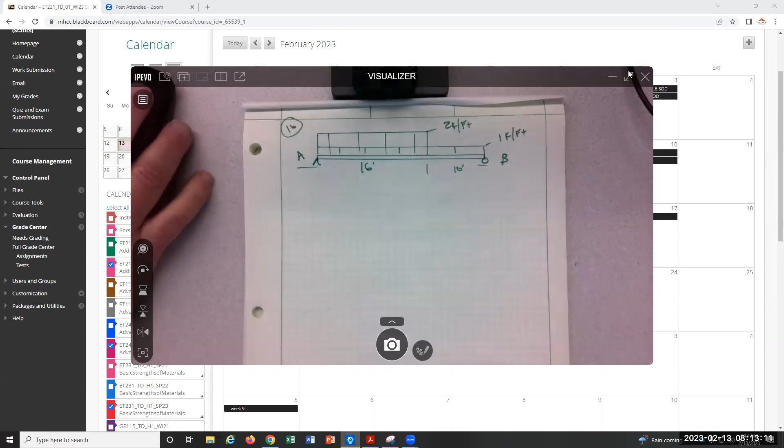All right, so let's go over number 16. Several folks had problems with 16. I went through the homework and the quiz—there were problems on the quiz and problems on this one, which I'm not sure exactly why, but I want to go through it and make sure, because this is very similar to something you will get on Wednesday. This one said, find the reactions at A and B.

When you get a problem like this, especially Wednesday, it's good to categorize it in your head. If it's saying find the reactions, then you are working with equilibrium, and that's those 3 equations. If it says find the resultant—I'm sorry, they both start with R—but if it says find the resultant, you're not working with equilibrium. The big problem students have on Wednesday is it'll say find the resultant, and everyone goes for the reactions. That's not what we want. If it says find the resultant, you just want to take these 2 forces, concentrate them, and then find the single force that could replace them. So that was like chapter 3. That's the big confusion.

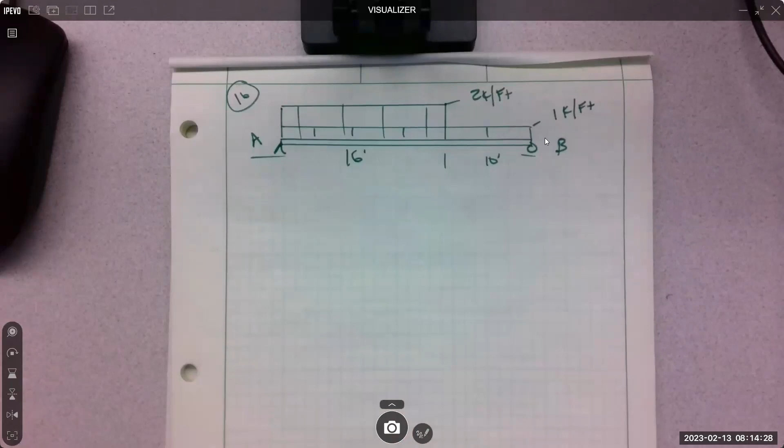Chapter 4 is find the reactions. And reactions are—if I get rid of the support and put in the reactions, AY, AX, and BY—I get rid of those supports. That's the free body diagram. That's chapter 4. These are reactions. There's 3 of them.

These are external forces, and if I combine the external forces into one force, that would be a resultant. Two different creatures. We don't do resultants when we're doing reactions because everything's equal to zero. There is no resultant. So if that's still not clear, try to get that clear before Wednesday, whatever it takes. We got to figure that out.

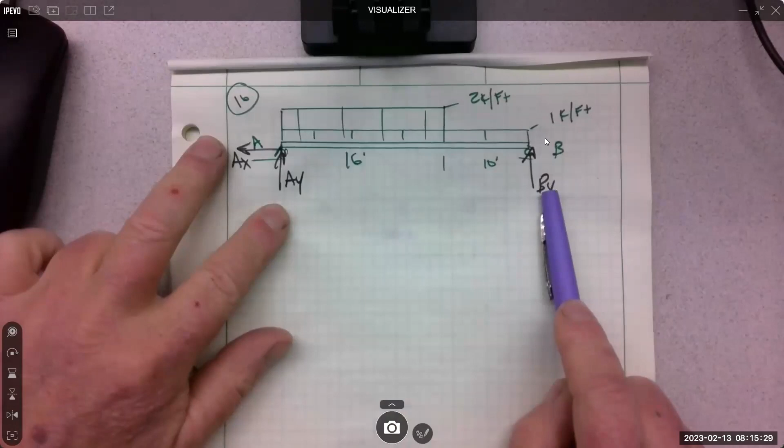So what do we do on this problem if we want to find the reactions, these three? What do we have to do with these distributions? We don't do any moving, not when we're doing reactions. What do we do with distributions in general? Do we leave them like that?

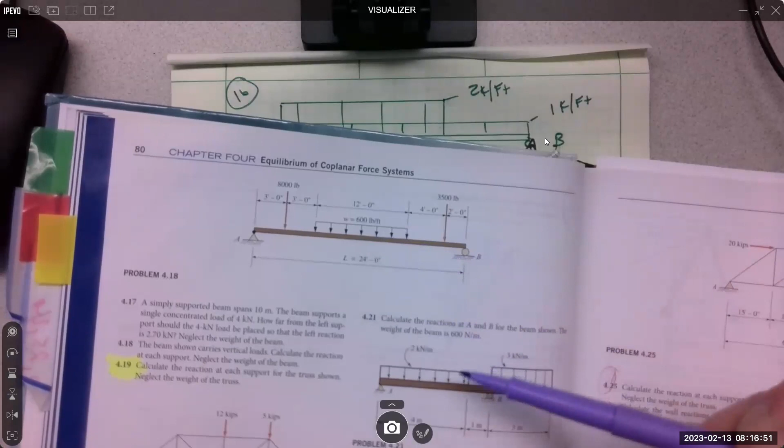Like if I'm going to sum the moments, how would I do that? Yeah, you got to concentrate the distributions. You got to get rid of them. Turn them into a single force. That's the first step. Anytime you see a distribution like this, or any other distribution, all of those, step one is get rid of them, concentrate them.

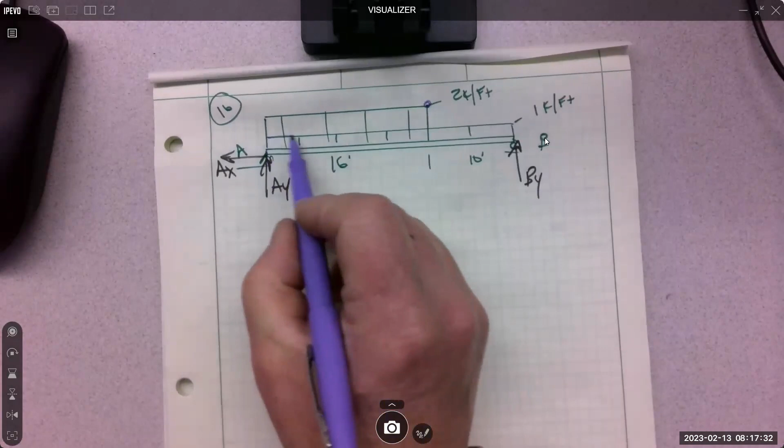How do I concentrate a distribution? How do I get rid of this rectangle? Yeah, calculate its area. So you can do this a couple different ways. You can use this 2 foot, or you can use this 1 foot. And I think that's where people got confused, because this is 2 foot right there. So I can use this rectangle and concentrate it.

That's how I would do it. How tall is that rectangle? It makes a total difference. The way you concentrate it is the area. You got to know how tall it is. Area, right? Length times height for a rectangle.

What if it's a triangle? 1/2 base times height, right? What if it's some parabolic curve? That'd be rude if I did that, because we haven't done one yet. But what if it was? How are you going to concentrate some crazy parabolic curve? Front cover of the book has the area of some crazy curve right there. So yeah, we have to know the area.

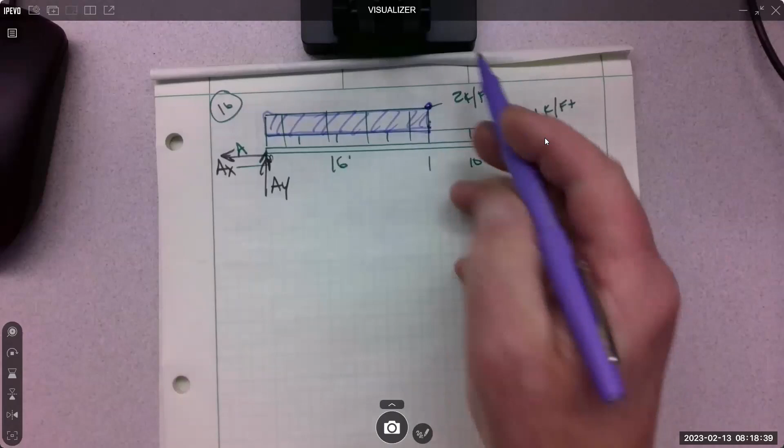You got to know the area, then you got to know the height. How tall is this? If this is 2, if this is 1, and that is 2 up here, how big is this? Yeah, it's a graph. So this is 2 all the way to the top, and this is 1 all the way to its top. So that's got to be 1 and that's got to be 1. So it's easy, when you have multiple distributions, to screw that up.

How would you know that? Was there like cases where the distance is 3 or 4? Well, the only way you're going to know it, Ben, is to really slow down and try to figure it out. Like, what's this one?

Two distributions, right? How tall is the rectangular distribution? Don't overthink it. Oh, right there. Sorry, maybe I just didn't give you a good enough arrow. How tall is the rectangle? 6. So how tall is the triangle from here to here? 6.

It's a graph. If I said from here to here is 6, how tall is this? 6. So then if I said from here to here is 12, how tall is this? 12. So then how tall is that? Yeah, same thing, same exact thing, right? We're 6 here, we're 12 to the top, we're 6 there. So yeah, you just gotta draw extra pictures, right? Or whatever it takes.

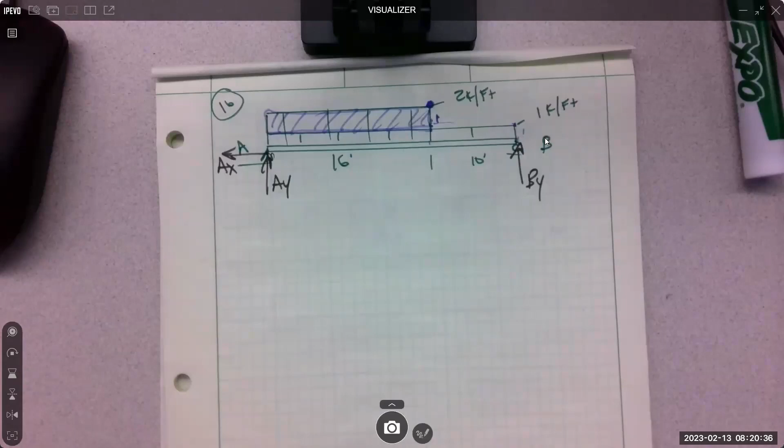All right, so this one is 1 and this one is 1. So I would concentrate them separately. You can break distributions up, concentrate them separately. So how big is this rectangle? Yeah, 1 times 16. And where do I put it? Halfway. So this is 8 over 8 feet, and it is 16 kips. Because I just did this piece, right? This purple rectangle.

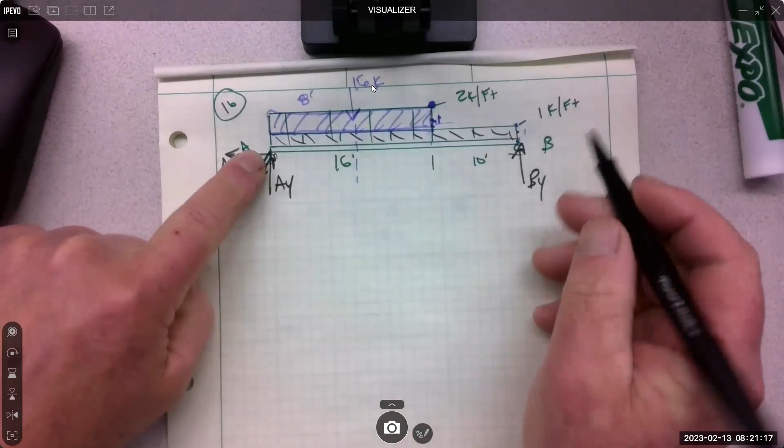Now I'll do the bottom one. I'll give you different hash marks. So it's 1 times this distance, 26, and where does it get applied? At 13, yep. So I'm doing it all on this thing. Now I have a force 16 kips and a force 26 kips, and my 2 distributions are gone, right?

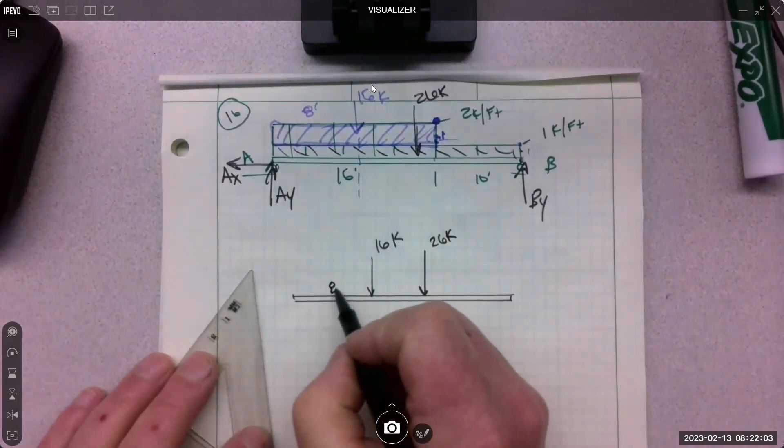If I did redraw the beam, and I'm going to because I want it super clear: it looks like this. 16K and 26K. This is 8 feet over, and this is 13 feet over, right? And then I have BY.

So this is the new free body diagram. AY, AX, right? The pin's gone, the roller's gone, the distributions are gone. This is a good, clean free body diagram. That is also 13. So this distribution is probably the weight of the beam. When you see a uniform distribution throughout the beam, that's probably the weight of the beam. And then this is some extra load.

So now this problem asks for the reactions. That's why these 3 are in here, and then that's the goal. If you're asked for what are the reactions, we want to know what these loads are on the supports.

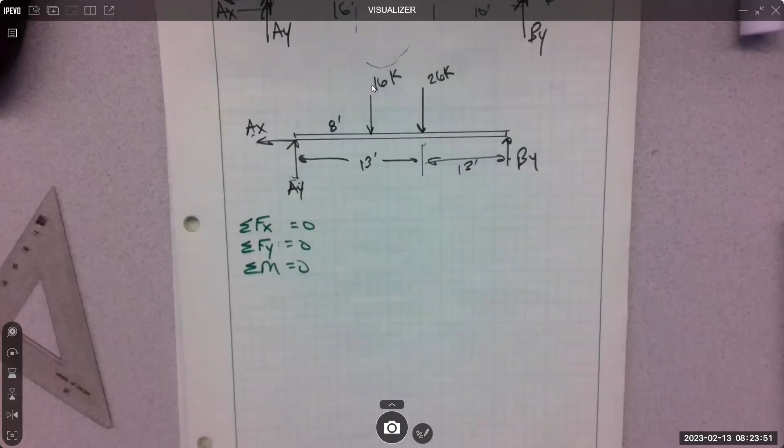So the easy one is: is there a force in a direction all by itself and nothing else? Yeah, AX is the only force in the X direction. So if I was to write that equation, it looks like minus AX equals 0. So I just summed all the forces in the X. There's only one, it's got to be equal to 0. Done. AX equals 0. That's one of the 3 reactions, just by picking that thing out.

How many forces are in the Y? How many unknowns in the Y? 2. So if I write this equation, I'm going to end up with 2 unknowns, and I will not be able to solve it. It might help me in the end. If you don't know what to do on find the reactions, just do the equations. Do all 3. I can say that 100 times, but come Wednesday somebody will get this problem and they will not do the 3 equations. Why don't you just do the 3 equations? If you don't know what to do, just apply these equations.

So summing forces in the Y, tell me what all the forces are in the Y direction. Plus or minus? Minus, because it's pointing down. Yep, what else? Minus 26. Don't forget your unknowns. BY. And we set that equal to 0.

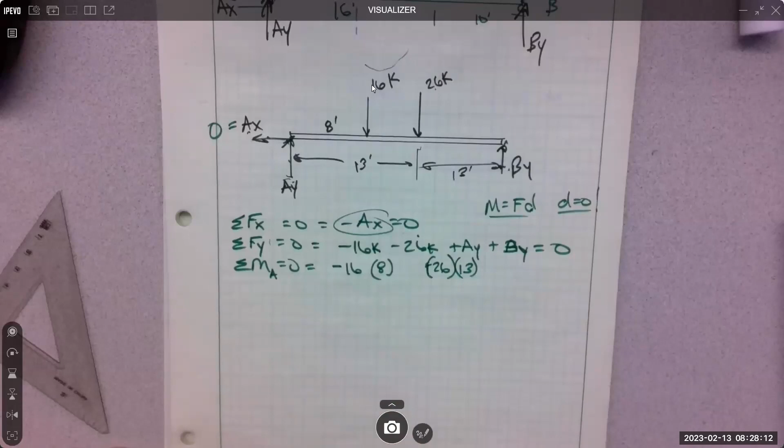So then I would go 26 times what? Oops, I don't know where that came from. Plus or minus? Minus, rotating clockwise still. Then what?

BY times 26, and I drew it pointing up, right? That was my assumption. When you put reactions in, you are assuming a direction of rotation. I assume this going up, so that means I'm assuming that this rotates counterclockwise around A, which is positive. That's super important.

And then what about AY? About point A, does it create moment? Nope. What about AX? Nope, they both go right through the point. So this is a great spot to choose because 2 forces drop out.

This is a good spot to choose, but only 1 force drops out, right? Actually, AX drops out too. So, all right, set it equal to 0, solve for BY.

So I'm going to leave the BY statement right there because it's positive. Let me work with you on that. So if I'm leaving this algebraically, if I'm leaving this right here, Ben, I'm not moving it to the other side because it would then go negative.

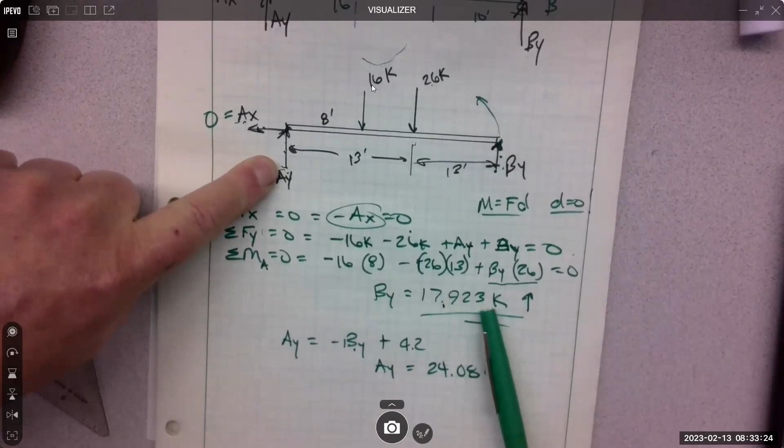So think about forces in the Y, they got to balance out, right? We want forces in the Y equal to 0. So how much down do we have? 42. So how much up do we have to have? 42. So if this one's 17.923, then this one has to make that 42. So that's the 24.

Yeah, it gets a little more complicated. Just turn your angled forces into X and Y components and go after it. Then it looks a lot like this, absolutely a lot like this. It's longer, more time consuming, more opportunity for mistakes, because you're turning forces into their components. But just go slow, be careful.

That help? Hopefully that helps. I want to go over the quiz. It was very similar to that.

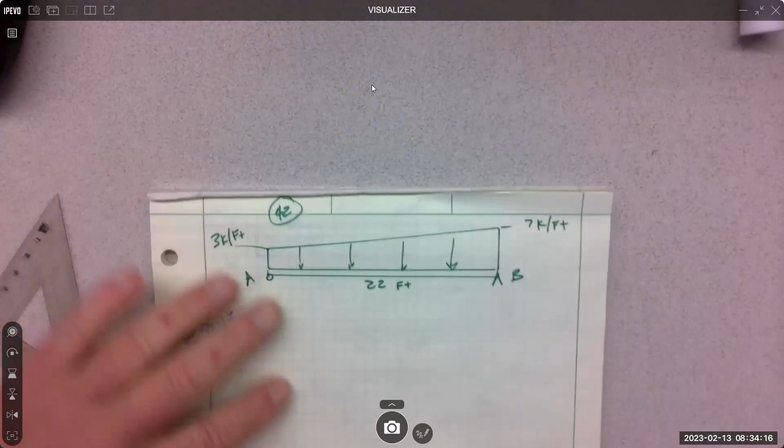I think you had to find these reactions. Let me make sure. Yeah, it said beam supported non-uniform distribution shown. Calculate the reactions at each support. Neglect the weight of the beam. So it says calculate the reactions - that means I need to put in the reactions for the supports.

So a pin, how many reactions does a pin get? 2. One up, I'm sure, because there's a lot of force coming down, but I am guessing on By. And then one in the horizontal. Do you see any horizontal forces on this system? No. So you can point it either direction and just say it. If there's no X forces externally, then there's no X forces internally - nothing to balance out.

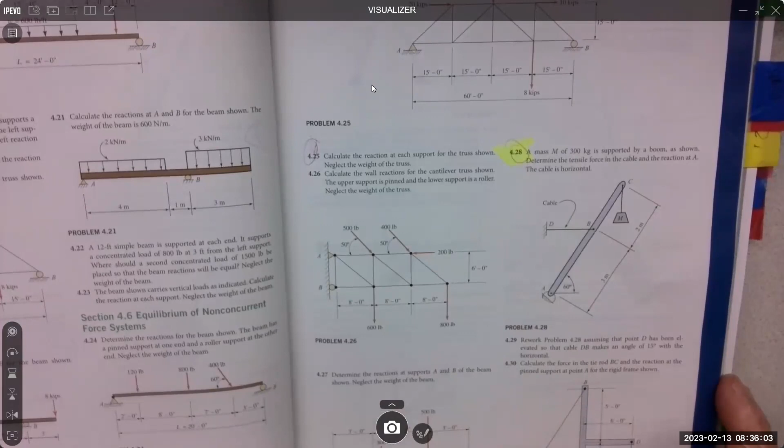So far we haven't gotten any X force - oh, we did have one, and I'm gonna work that problem. Right, we had X forces all over this thing. That was one of the homeworks. Tons of them, good times. So I'll do that one next. It's a lot of forces, it looks hard, but it's no different.

Well, not only adding X force, but you're adding Y distance. You're adding structure to it, right? Where this kind of stuff has no Y distance stuff going on. So it is more complicated for sure.

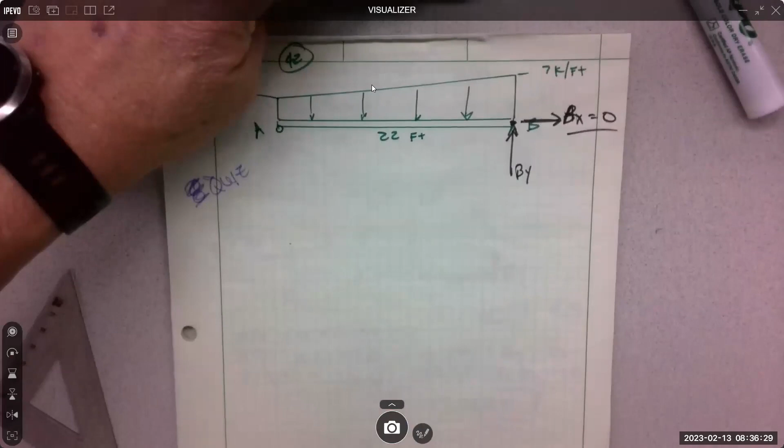So BX equals 0, BY going up. How many reactions for a roller? 1. Which way do you think it goes? Up. Emphasizing that that's a guess - all of that's a guess. Let's have a bad guess here: I want to say AY goes down. I don't know why I'm saying that, but I am. I'm going to say BY goes up, AY goes down, and I'm going to let the math tell me I'm wrong. All right, what do I do with this distribution?

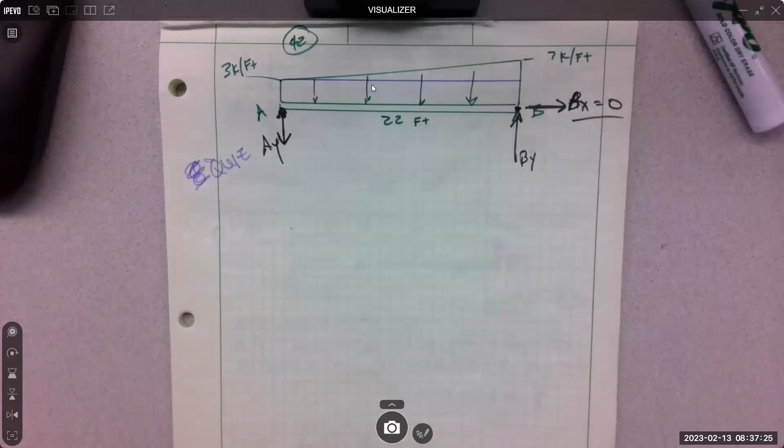Hopefully we know that one now - what do we do with it? Concentrate it, right? And I always draw pictures. So there's my rectangle, I'm going to split it into 2. I mean, you can look up a trapezoid and do it, but I just split it into 2 and go that route. So rectangle, how tall is my rectangle? 3. And how long? 22. So what's that? 22, 44, 66.

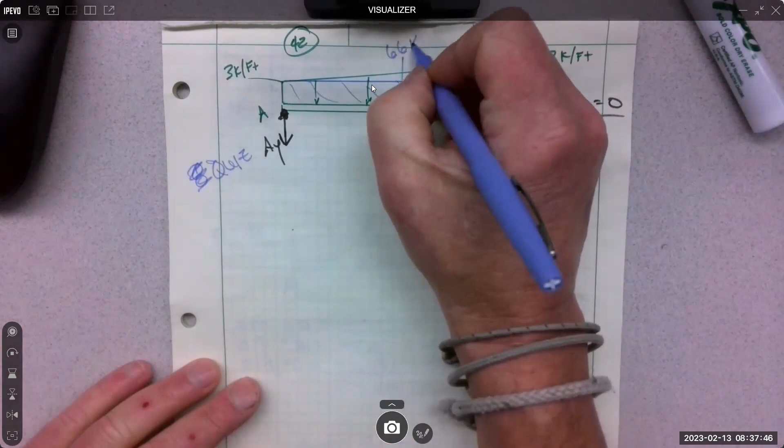Yeah, 66. And where's it go? 66 kip in the middle, correct? So 11 feet. Wait, if you do the one with the 7 feet, is it also going to be in the middle as well? Whoa, let's just do the rectangle first. Are you happy with the rectangle? Yes. Okay, now let's go to the triangle. How tall is the triangle? 4.

Yeah, so now we got - and it goes all the way to the end, right? So what's the area of a triangle? It's 1/2 the base times the height, right? So 44. Did I do that right? I just took 1/2 of 4, 2, and multiplied.

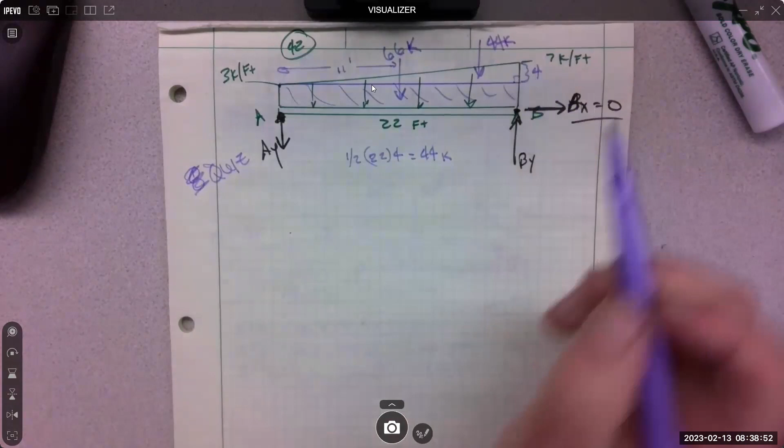Yep, and then where's it go? Geometric center. Anybody remember where that is? Yeah, from this 90, it's 1/3. So what's 1/3 of 22? Like 7.33 feet, from B, right? Yeah.

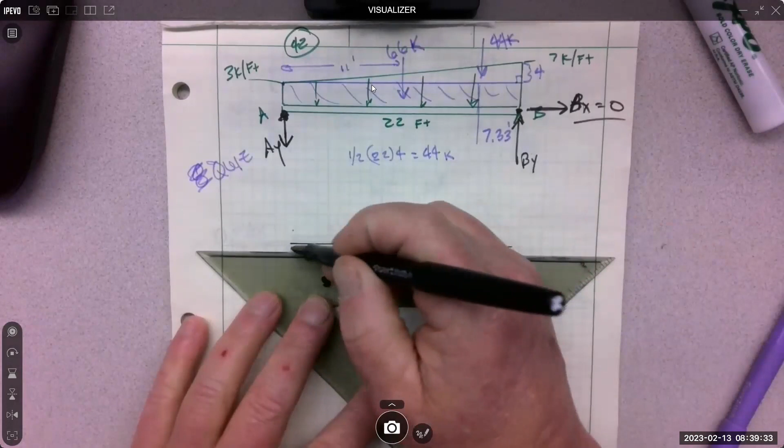So just be careful when you concentrate it, make sure you find your distances. And again, especially for the test, I would draw a new beam just to clean things up so I don't make any mistakes. So I have BY, I have BX. I have a really bad decision on AY going down. And then I have 66K in the middle at 11 feet, and then I have 44K at 7.333 feet - that repeats. Right, and I know this is 11 feet because that was in the center. So yeah, just have to be careful with everything now.

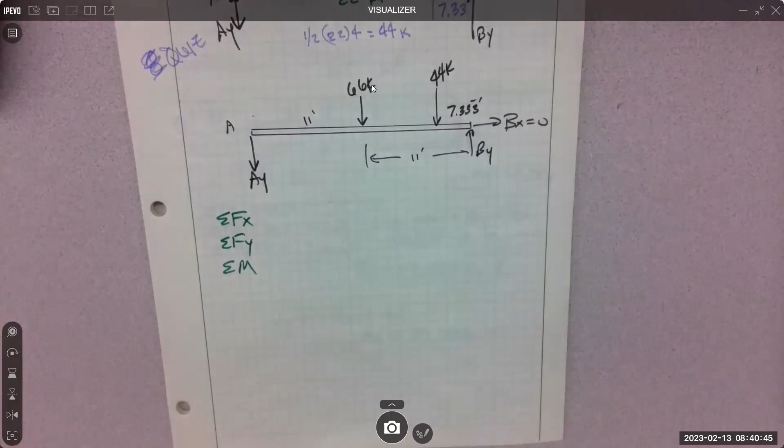All right, how do we get AY, BY, and BX? Yeah, apply the three equations of equilibrium. And again, if you don't know where to start, sum forces in the X, then go to summing forces in the Y, then sum a moment - just do them in order if you don't know where to start. We already kind of did forces in the X, right? We know that's equal to 0, and we have one of them, BX equals 0.

All right, let's sum forces in the Y. What are they? Negative 66, negative 44, plus BY, minus AY - exactly, all that's equal to 0. Don't miss any, right? Can we solve it? No, two unknowns. So now what?

Do a moment - where do you want to do it? I like B because I know how far this one is from B, and I know how far this one is from B. If I do A, I have to do a little extra math to figure out the 44 distance, and I just want a simpler route. So I say, great idea, let's do B. Where do you want to start?

Start in the middle. All right. I wouldn't do that, I'd start and go in a system, but I'm good with you. 66 times 11, it's not that hard. We can figure this out, right?

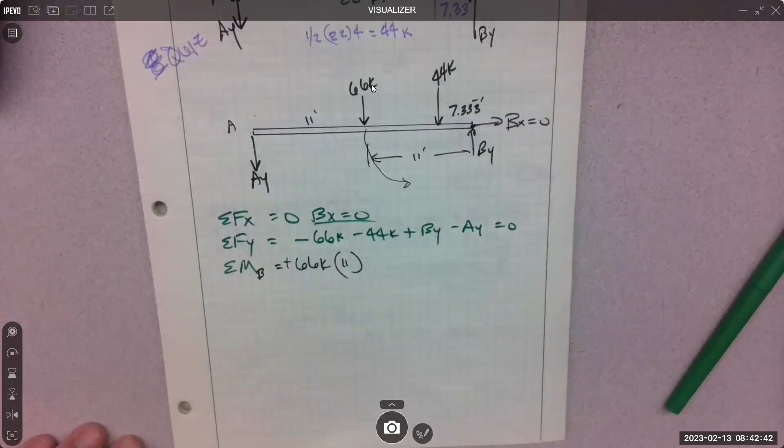What else? So I heard the 44 first. 7.333 and its rotation, positive. So now we have these two. What else? Yeah, AY times 22 and its rotation. Positive.

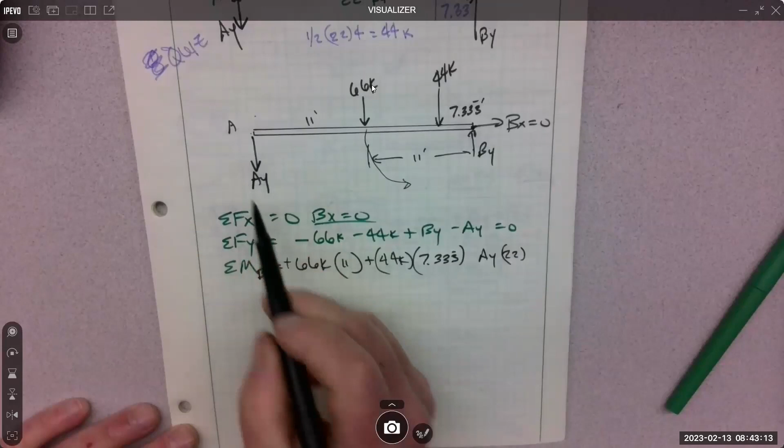And BX goes right through the point and BY goes right through the point, so those drop out. So now we need the algebra for AY. We have to clear this statement. So this one moves over, this one moves over. Those become both negative. So I'm going to end up with AY times 22 equals, and now I'll calculate that, 66 and the 11.

And now I'm going to divide by the 22 to get what for AY? 47.66 kips. So if you've done the math right, the number is correct, right?

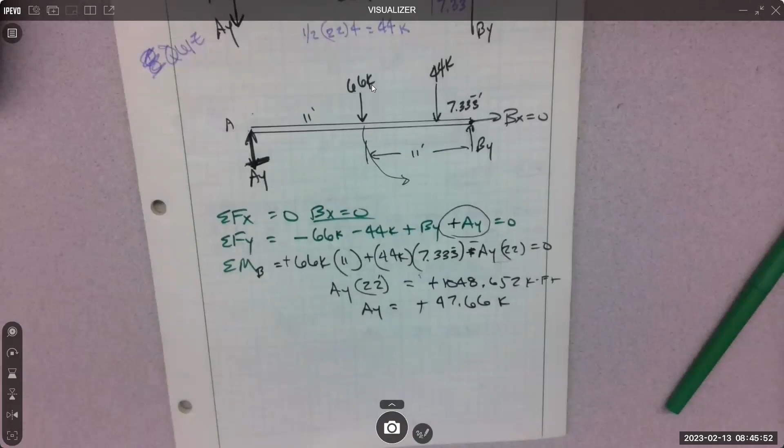Okay, anytime you come up with a negative out of a moment equation, then you've done something wrong. There's a direction, and these are going to get complicated where you're not going to know which way it goes. Like when we look at this one, it's like, really? Tell me which way Y goes for A. There's no way, you got down force, down force, down force, down force. Okay, I guess I could tell you that that goes up, it's got to go up. But if one of these pointed up, then I don't know what wins, right?

And I don't spend a lot of time thinking about it. I just draw them in and go. Just make a guess and go.

All right, excellent, got AY, how do we get BY? Yeah, plug it back in, yep. I know that 66 and 44, that's all down force, right? So what is that, 110?

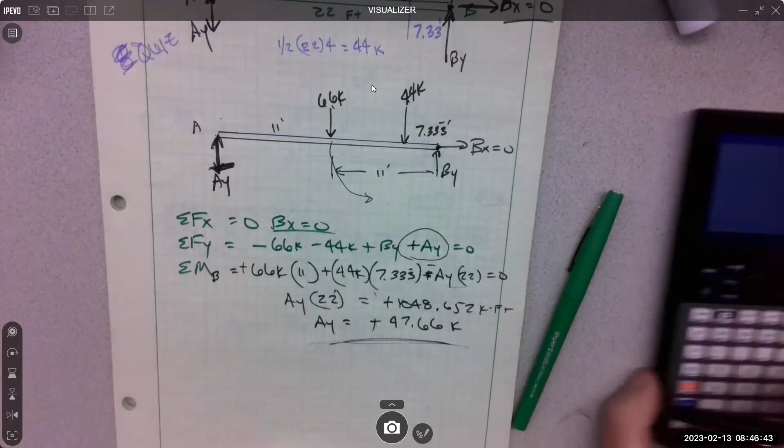Good question. So you know how we started taking the moment from B? So we assume that 66K is going counterclockwise, which is what? No, we didn't, that's not an assumption. Right here is where we're doing our moment. If I attach a string and let go of that thing, it is definitely spinning around counterclockwise.

That's positive, on the AY going down. It was going down originally, that's also positive, and we put it in positive. Oh, okay, yeah, we just made a bad guess. But then when we realized we were wrong, I went and changed everything. Yeah, sorry, for some reason I thought it was negative. Oh no, mixed up with A and B, no.

So to get BY, right, I got how much coming down? 110 coming down, I need 110 going up. And I know I got 47.66, so I just kind of use basic logic on that. 110, take away the 47.66, I got to have 62.34 going up. So BY's got to be equal to 62.34 kips going up.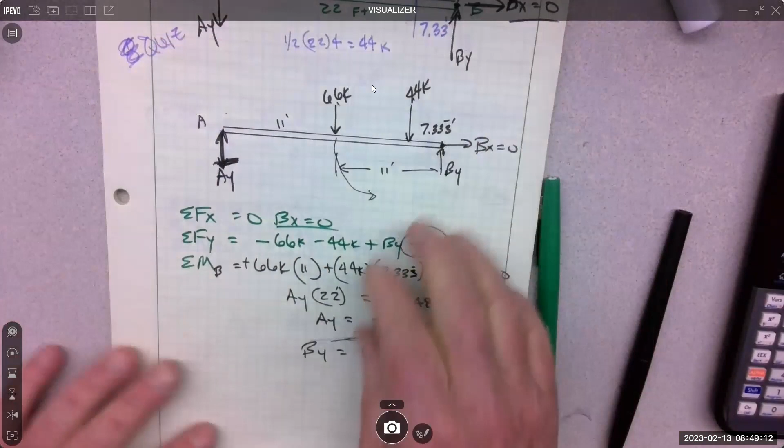So that's another check you can always make. If it's not too complicated, you can say, oh, there's more load on this side, BY needs to be bigger than AY. So if you do all your math and it's not that way, then you screwed something up, right? So yeah, that's always a good check. A little estimation always helps.

I don't know, usually when I do it in class it doesn't feel too bad because I'm going through it step by step and answering questions. But then when you get all by yourself on a homework problem, you're like, what? Where do I even start this thing? Right, no, that's a pretty normal thing. Pretty legit.

All right, I'm gonna do this one, but we're gonna take like a 5-minute break because I want you to clear your head somehow, however you do that. I walk outside, so that's what I'm gonna do.

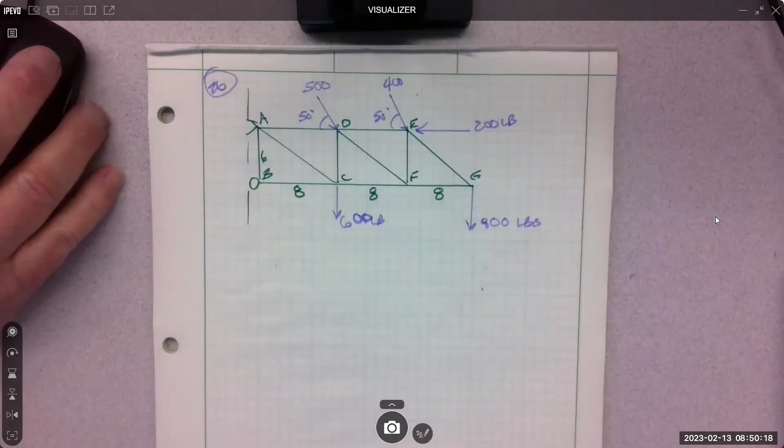All right, so this one says, again, find the reactions. So this is all still chapter 4. After this one, we'll go back and think about chapter 1, 2, and 3, so that'll get you all prepped up for Wednesday.

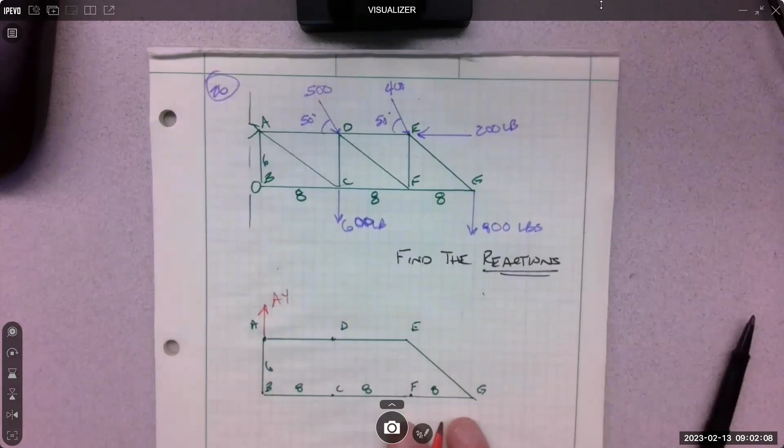So this one actually says find all the reactions, but same thing, right? That means we take away the supports and put in the reactions. So how many for a pin at A? Two, so an X and a Y. Which way do you think the Y goes, up or down? Up, I agree. AY. And then what do you think about the X, left or right?

To the left? Yeah, probably to the left, although we do have the 200 going to the right. So there is, don't you see that? 200, oh sorry, going to the left, right? So if we needed to oppose that, which way would we put it? To the right. But this one also has right effect. So there's left effect and right effect out here. So honestly, I don't know which way it goes, I don't know which one's bigger.

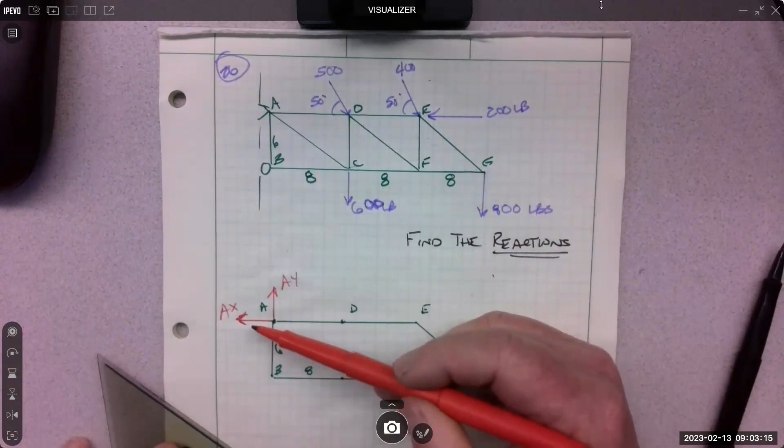I agree, yeah, yep, I agree. Like if you think about it, what about these? What are these doing? They're trying to pull it down, right, this way. So this probably goes that way, so we'll make a good educated guess here on AX. But again, sometimes you don't know. Like if this was 10,000, I'd be like, I don't know which way that goes for sure, it might have to actually push to the right. So again, it's just a guess.

What do you think about B? We get 1 for a roller, right, and it's always perpendicular to the surface removed. So the surface removed was vertical, so perpendicular to the surface removed is horizontal. So with all this kind of trying to lever it down, this is probably trying to push it to the right, but again, it's a guess. It's all just a guess.

Perfect, thank you. I'm thinking ahead, I'm thinking probably too far ahead. So, all right, so now I think the best strategy is get your free body diagram done, right?

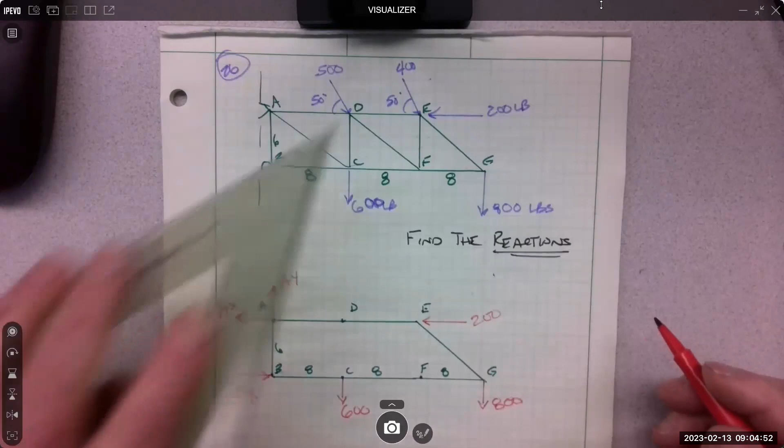So put the 600 in. We already have our reactions in. Put the 800 in. Put the 200 in. Those are all the X and Y forces. And then for the angled forces, put in their components. Don't put in their angled forces because that's going to be a tough moment, figuring out that perpendicular distance and all those crazy things. So break the 400 into its components here and here, and find those, and the 500 into its components and find those.

Okay, so if I'm going to use the 50 degrees on that 400, and if I want this opposite side, that's sine, so it should be sine 50 times 400 for this down force. 306.417. Everyone see what I'm doing?

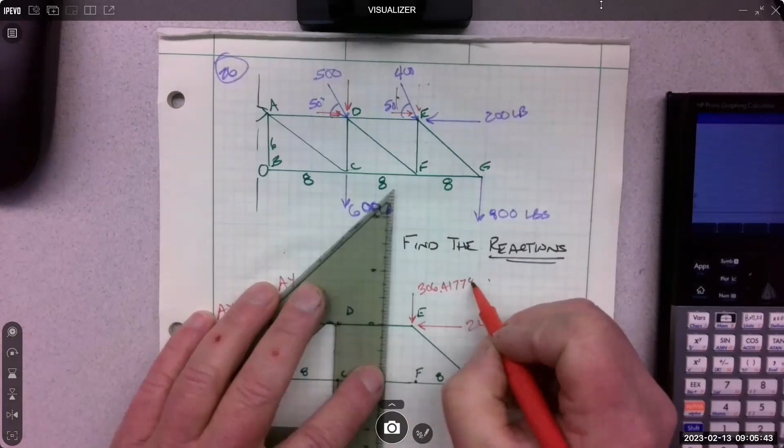41778. I'm just finding the components of the 400-pound force and putting it in the free body diagram. So then the next one is cosine 50 times 400. 257.115. The glare is just terrible in my calculator.

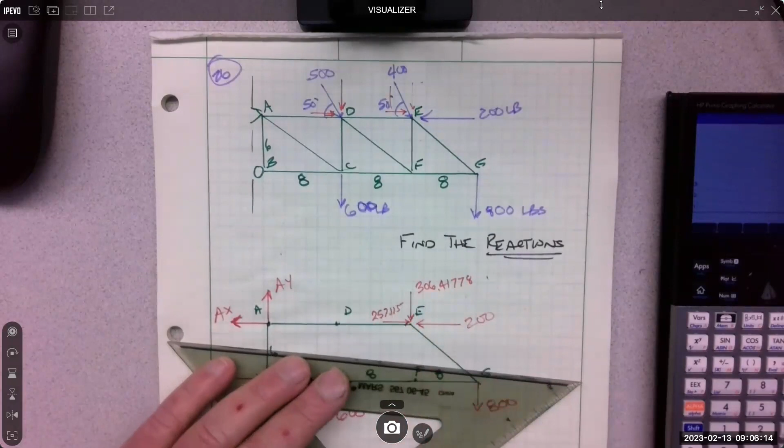257.115. Just for space, I'm gonna cut those a little short. Same thing over here. So this one's gonna be 50 sine 500 for the Y, 383.022.

And I know that these point down because this has down effect. And I know they point to the right because it has to the right effect. So then 50 cosine, 500 times, and 321.394.

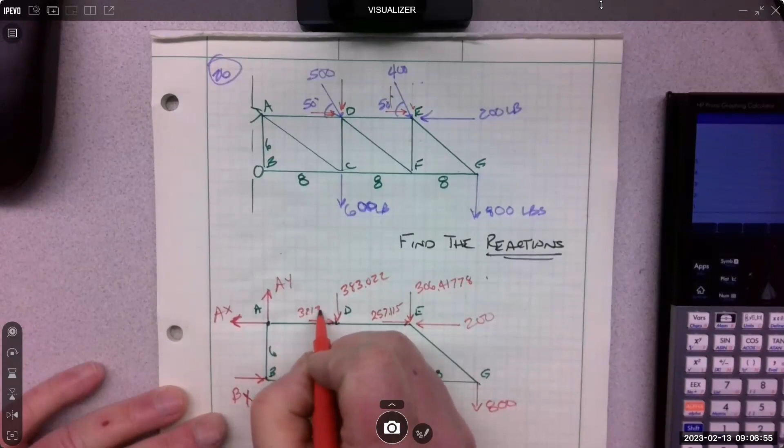All right. So then you have that. It ends up free body diagram. It should stand alone, all by itself. No need to look back at the previous problem.

I have the distance 6, 8, 8, and 8. I have all these X and Y forces at their location. It did not label all the points, but I did. Notice I left out the internal structure because I don't care about that. We don't look at that internal structure until we take it apart. And that's chapter 5. Right now, we're just dealing with the external forces to this system.

And we want these reactions. That's our goal. So I don't really care what's inside or what it's made out of in there or anything like that, because I'm not taking this thing apart. I'm leaving it together as one solid system. Okay? So now what do we do? How do we find these?

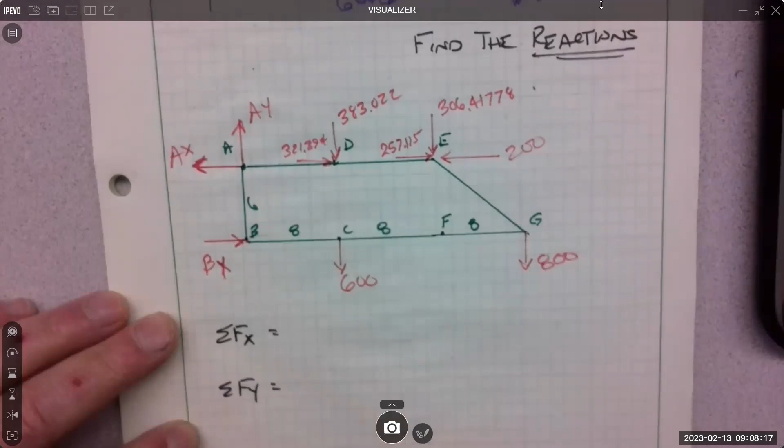Yeah, same way we have always found them. Regardless of how complicated it looks, we are going to sum forces in the X, and we are going to sum forces in the Y, and we are going to sum a moment somewhere. That's how we're going to go after it.

So at this point, you can say, like, which one do you want to do first? Doesn't really matter, but is there one you want to do? Is there one where you can solve for something? Because you don't have to do them in this order. You can do them in any order you want.

How many unknowns are in the Y? 1. You can solve for AY right now, right? How many unknowns in the X? 2. Probably don't want to do that one right now. That's, I can do it later, but I might need it at some point, but I'm not going to do it. And then we could sum a moment somewhere, couldn't we?

Where? If we did point B, what drops out? If we did a moment at point B, what would drop out? Which force does not contribute to a moment at point B? AY does not contribute because it goes right through the point. That's correct. What other force? Yeah, BX, the easy one. Does not contribute to the moment here at B.

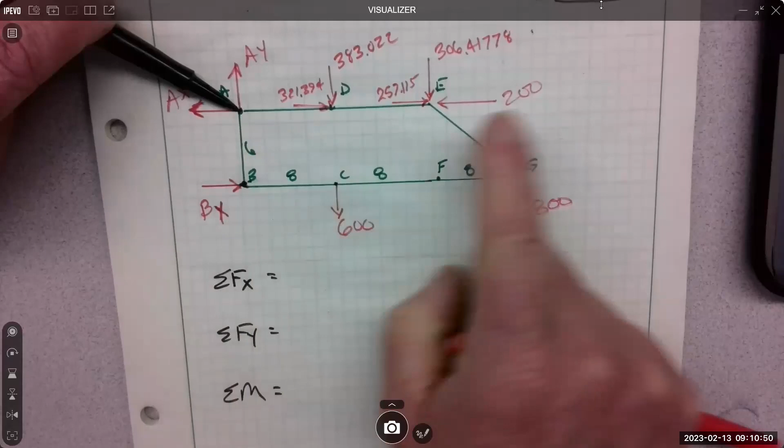No other forces go straight through point A? Really? That X force goes right through that point, does not create a moment. That X force does not create a moment, goes right through that point. What about the 200? Does not create moment, goes right through the point. So the forces that drop out of the moment equation at point A, 1, 2, 3, 4, 5 of them.

I'm liking that. I'm not gonna have to do any of those, right? So this is a great spot to do a moment. All right. Let's do, you identified this first, so let's do this. Sum forces in Y. What are all the forces in the Y direction?

No, when you're doing forces, you're not doing it at a point, right? It's just forces. The only time you need a point is moments. So when you're doing forces in the X, you don't need a point. You're just doing all the forces in the X. And you're doing forces in the Y, you just look for all the forces in the Y and write them down. So AY up.

No, when it's not a moment. Don't do moments. It's easy to mix it up. Plus? Yeah, minus. Y minus? Nope. We're not doing moments. Y minus 383. Correct. When we're doing forces, it's just whether they point down or up for the Y. And when we're doing forces here, it's whether they point to the right or to the left. That's it. That's how you get the sign. This is rotation. This is whether it's going this way or this way. This is whether it's going up or down. This is whether it's going right or left. That's the signs. All right, good.

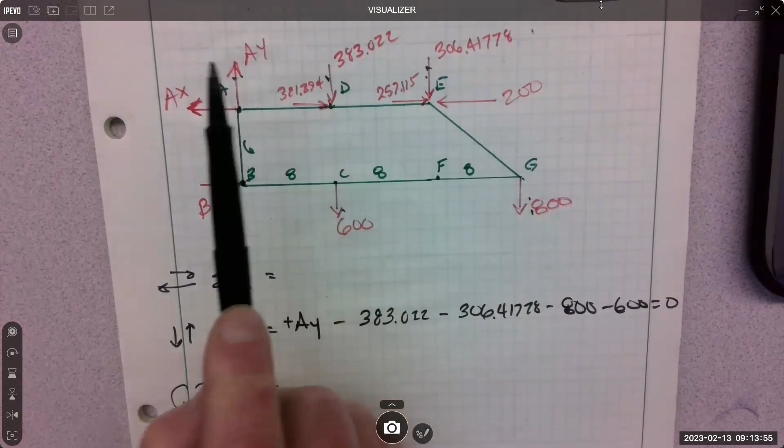Right? All these down effects, down, down, down, down, has to be balanced with that up effect. That makes sense? Excellent. So then you just flip and add them all up, right? It's a big number.

We have 306.41778, and 383. I think I got it. Yeah, 2089. 2089.45.

That's what I get, pounds. So there's a whole bunch of, that's called shear. There's a whole bunch of shear going on at this pin. Like this whole truss just wants to go straight down. The only thing stopping it from going straight down is that pin right up here. So if I was going to design this pin, I need to know that there's 2K acting on that pin in shear, just trying to shear it off.

So if I build that pin out of 1-inch wood dowel, it's gone. It's just going to disappear, right? Even 1-inch mild steel, I'm going to want to run that shear stress equation to figure that out, right? But I'm probably getting closer to something that'll hold, or maybe 8 half-inch bolts. You know, whatever we decide there, it's got to carry that load. That's the point. That's why we do this. That is the only reason we do this.

Pain. All right. So what else now? I need BX and AX, these two things. So they're both in the X. You can run this equation, but you're going to end up with two unknowns.

So I'm not going to waste my time with that. So forget that. I'm going to do a moment. We already talked about moments. And we know if we do a moment here, there's a whole bunch of stuff that drops out, right? So I'm doing my moment at A.

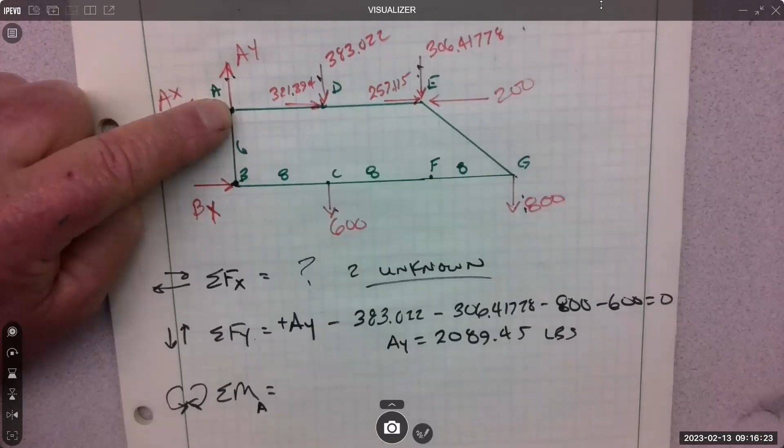So now we just have to methodically work our way through it. And I would work around the system so I don't miss anything. You've already identified that these two drop out of the moment at A, and that one drops out, and that one drops out, and that one drops out. So I'm not even going to think about those. They go right through the point.

I am doing moments now. The 383, does it create moment about this location? Absolutely. That moment is just like that. It's going to rotate around point A. So I'm going to include that.

What's the distance? Yep. And what's the rotation? Yep. Just do them one at a time. Don't look at the whole picture. That one is done. What about this one? Does it create moment? Yep. What's its distance? 16. And rotating that way, negative.

What about the 800? Does its line of action have a perpendicular distance to point A? Absolutely. What is that distance? 24. And if I kind of slid it up here and put it there, how's it rotating about point A? Yeah, same way.

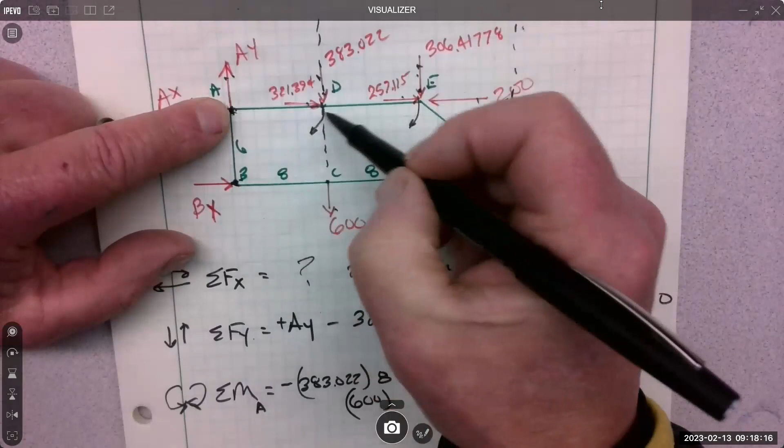What about the 600? Same kind of thing, line of action. Kind of slide it up here, 8 feet, right? And its rotation also clockwise.

Whoa, we got that one. You fell asleep there for a second, Ben, but you woke back up, man. You're here now. So we worked our way all the way around.

What about BX? Does it create moment about point A? Yeah, absolutely. That's the one we want. BX times what? 0. It goes right through point A. Yeah, it doesn't go through point A. It's like down here, and that's the perpendicular distance, 6.

And then which way does it rotate? Okay, something better rotate positive, because we have negative, negative, negative, negative. Something's got to rotate positive for this thing to be in balance. And it's BX fighting everything, fighting that, all of those rotations. Poor little roller down there is fighting it.

Set it equal to 0. Solve for BX. We'll leave it there because it's positive, and we'll move all these negatives to the other side. And they all become positive, giving us a positive value for BX. All right, I'm going to crunch it. Somebody else crunch it too.

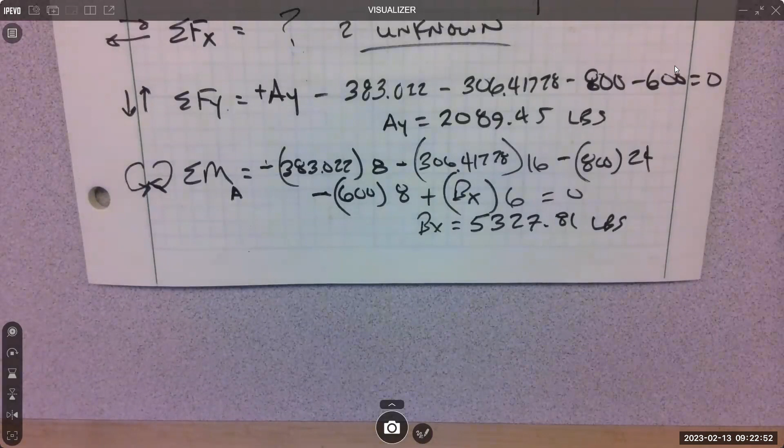Anyone else get 5327? All right, we're gonna assume that's correct. Nobody's verifying that with me yet, but we got to keep going, we're on a time frame here. So once I have BX and it comes out positive, that's important because that means I assumed the correct direction. BX does point into the structure. The wall was holding it away. That makes sense.

How do I get AX? So that's the one I don't know. I know AY, I calculated that. I know BX, I calculated that. So that one's done, that one's done, but that one is not.

How do we get AX? We know BX. Now we only have one unknown in the X, so we could do the X equation, right? We could also do another moment. You could do a moment down here if you really like this complicated force times distance stuff over and over. You could do another moment, that would work. But you could also just run the X equation.

So sum forces in the X. What are all the forces in the X? We got this one, 321.394, minus the 200, and we got the BX, 5327.81. What else? So we got that one, that one, that one, and this one.

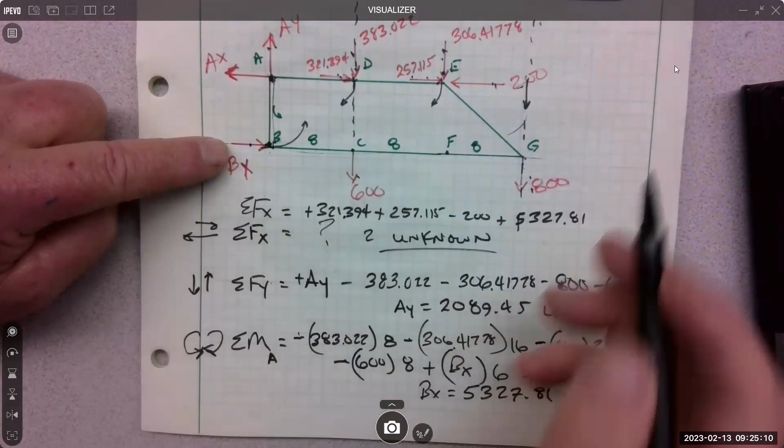Minus AX, we put it in going negative. So you got to put it in going negative. Should have only one unknown when you do that, but you need the unknown or you got nothing to solve. So since it's negative, I would move it to the other side and then all these signs stay the same. So we got the positive 5327, we've got a 200 that's negative, we've got a 257.

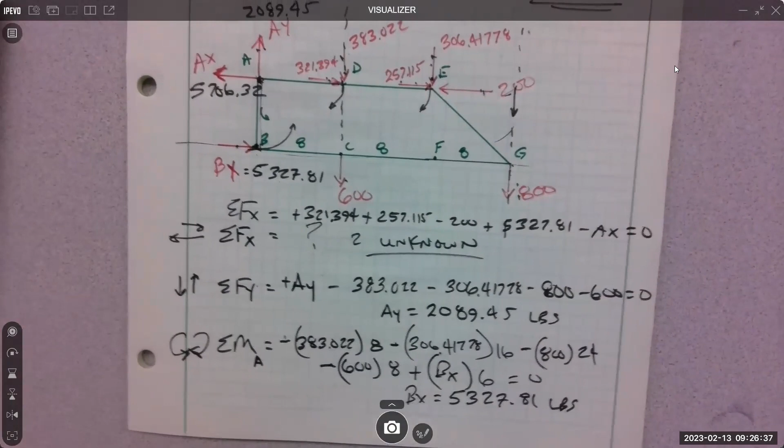So I get AX at 5706.32. Excellent. So now I'm just writing them in. Reactions are done. Right, AY 2089, 5706 for the X at A, and 5327 for this roller at B.

If I wanted the full load on A, it's the combination of these two. So the full load on A, square that, Pythagorean theorem it, and you'll get the full load. But we don't need that till next term.

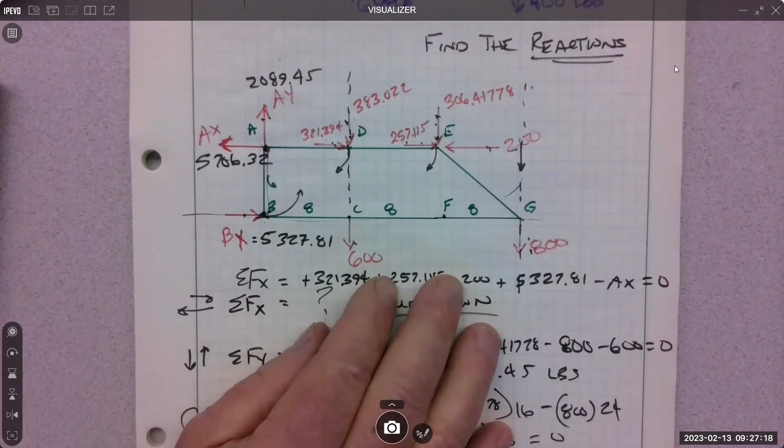So next term, that's the first 1/3 of the problem right there, and the next 2/3 is all strength of materials. Bending stress, tensile stress, torsional stress, shear stress, deflection. Good times. None of it's calculus based. So if you wrap that around calculus based, then you're going deep.

All right, good, does that help? Hopefully that helps. Will you see one like this on the midterm? Probably not that complicated. I actually might give you a truss, but then I'll probably give you like 2 loads on it and say, hey, find the reactions. Or I'll say, find the resultant. So that's the difference, we need to make sure we understand the difference.

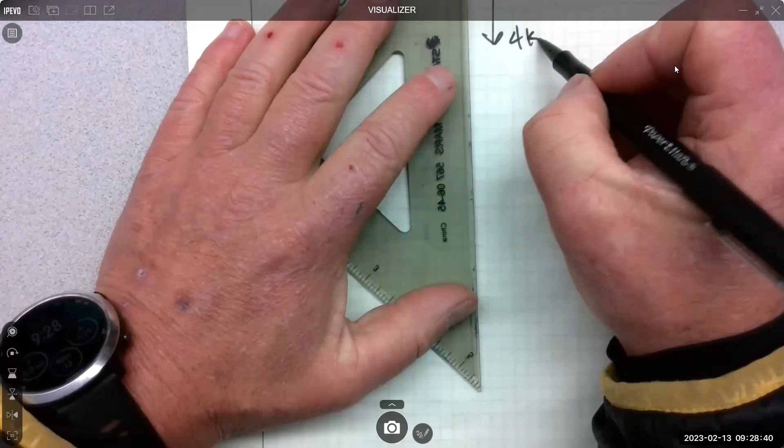So I could give you this, I'm just making this up. Some kind of wacky truss just to stress you out, right? And a roller and a pin and a wall and a load like this of 4 kips and a load like this of 2 kips, and then 10 feet, 10 feet, and 7 feet. A and B. Oh sorry, there, now you can absorb it. Right?

So chapter 4 is what we just did, and that would be find reactions. That's just what we did, right? Free body diagram, these are the reactions, find them. Chapter 3 is find resultant. What was that? Anybody remember what that was?

What forces? That's exactly right, but let's clarify. Adding the external forces, anything out there, right? So external forces, we leave the supports there. We just ignored them for 3 chapters, chapter 1, chapter 2, and chapter 3. We ignored whatever those were, we didn't even know what they were, right?

So the resultant says, take the 2K and the 4K and turn it into one force. Okay, and I would probably ask you, tell me where it is along the top of the structure or along the bottom of the structure, something like that. So how did we do that? How did we combine these things?

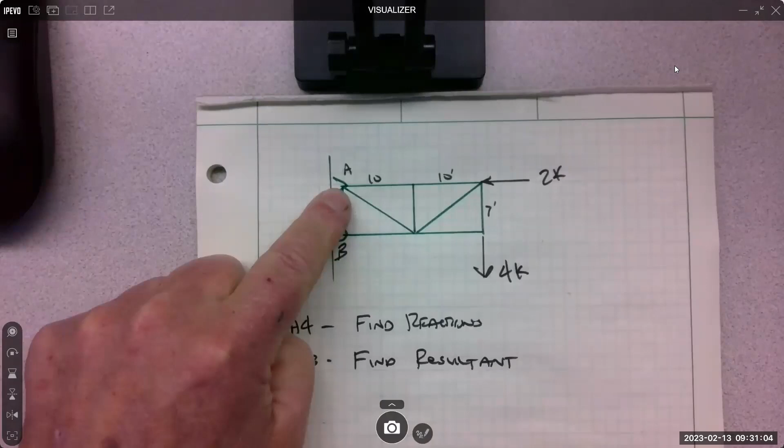Like if I said, okay, I'm going to move them all to point A. I gotta move them somewhere, right? You gotta move them somewhere, and how do I do that? So the way I did it was, if it's along that line of action, can't I just take the 2K and move it over there?

I can, yes, that's called the principle of transmissibility. I can move a force along its line of action anywhere I want to, because there's no moment involved. We know that now. The 2K, if I moved it to here, doesn't change the effect because that goes right through that spot. There's no additional moment.

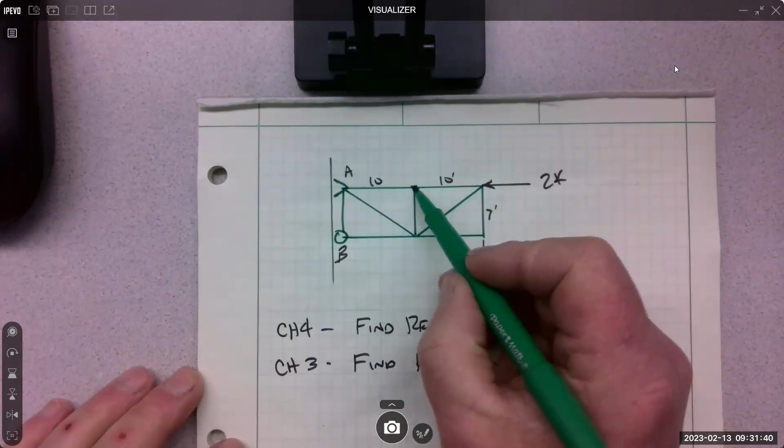I just move the 2K to there. Or there, if I choose A. So if I'm going to move it to A, the 2K, I just move it. Now it's gone. I can do that. It's called the principle of transmissibility. It's the same as I push on a car or I pull on a car, same effect.

What about the 4K? Can I just move it to there and not do anything else? No, because its line of action does not go straight through A, right? The translational effect, the 4K, yeah, I can just move it right over there.

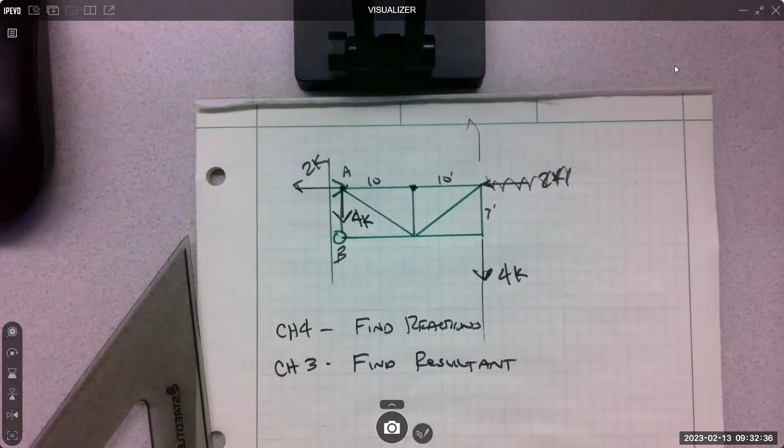4K, but what's got to go with it? The rotation, the moment's got to go with it, because doesn't 4K create a moment about this point, the point I chose to collect them? Yeah, what's the moment? Oh, I know, moment is force times distance. 4K times 20. Yep.

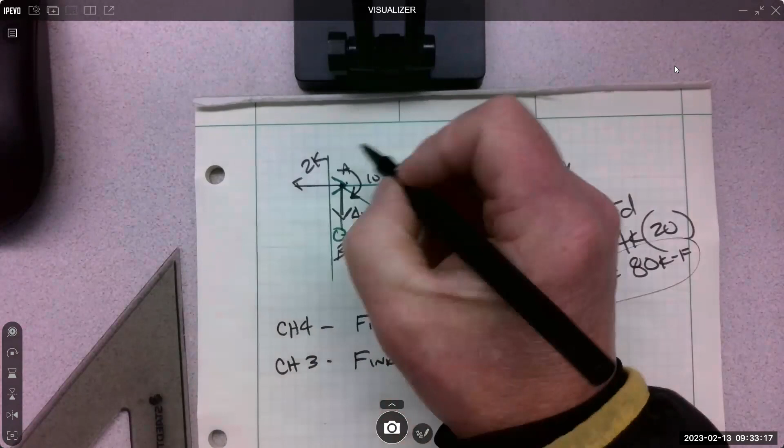Wait, whoa, whoa, whoa, whoa. Don't be jumping around mentally with me here. What we just did this for the 4K, right? So that comes over here. 80 kip feet, correct? Now that's gone.

So I move everything to one spot. Now, what do you want to do with the 7? Nothing, right? That's just a distance. Yeah, exactly. All right, you just got to slow it down, Ben. I think you just got to slow it down.

All right, so now everything's moved here. How do I find the resultant? Remember, the resultant is just a force, a single force. You got 2K to the left, 4K down. How do I turn that into one force?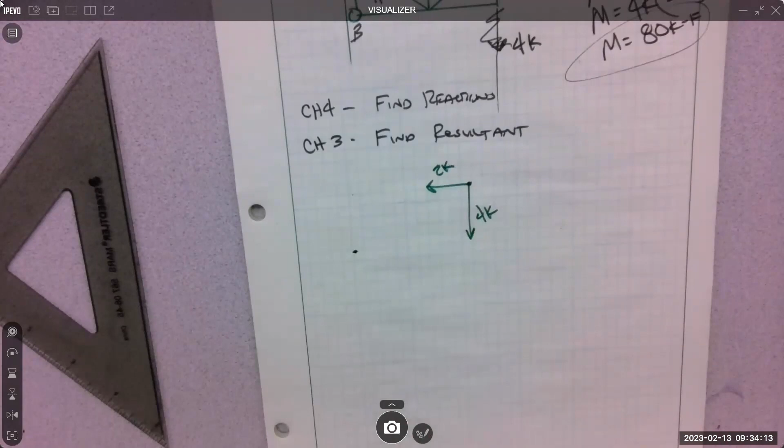He said it earlier. So this is what we have, right? How do I turn that into a resultant? Yeah, add them together, tip to tail, 2K, and then what's that thing called right there? The resultant, correct. You know, two sides.

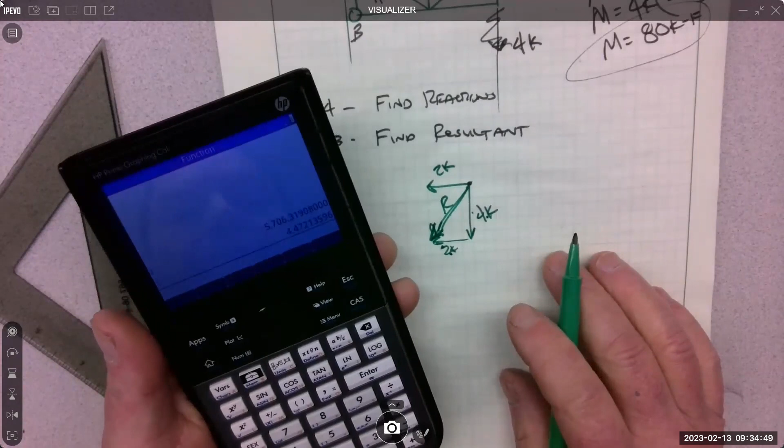Pythagorean theorem gives you 16 plus 4 is 20. I should not do it in my head. 4 squared, 2 squared, add them together, square root them. 4.472. That's the resultant. All right.

Now, that's not all we need. What else do we need? That's just the magnitude. Where is it? Right, where is it? So how do we know where it is?

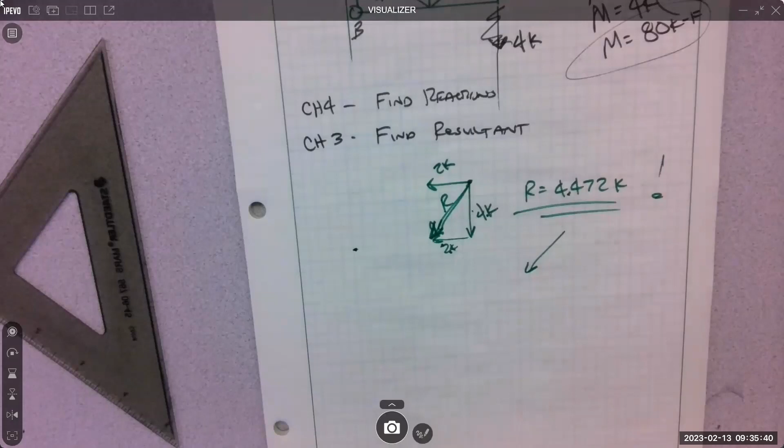Let's say on this upper chord, it's called a chord, this upper area of the truss. How do I know? I know it's kind of like down and to the left. So I know it's either out here down to the left or out here down to the left. How do I know which way it is, where it is?

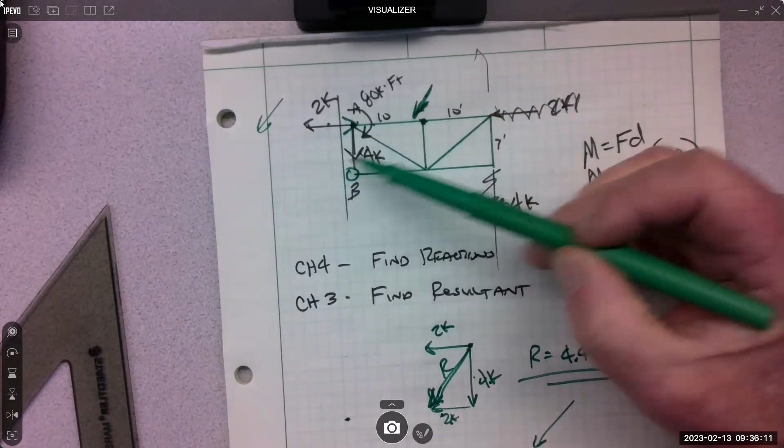I know it's out here somewhere or it's out here somewhere. Yep, our moment tells us where it is. We have to make this moment. So if I put it over here, would that force create that kind of a rotation about that point? Yep, if I put it over here, it's going to make that kind of rotation. That's not the same as this. So this is not correct.

It's not out there. And how do I know where it goes? Yep, we take the moment and divide by the Y force. If we divide by the 4K, we get an X distance. If we divide by the 2K, we get a Y distance, and we want an X distance. So we take the 80 kip feet and divide by the Y component of 4K. That tells us where it's at. Where is it? 80 divided by 4? 20? It's right here.

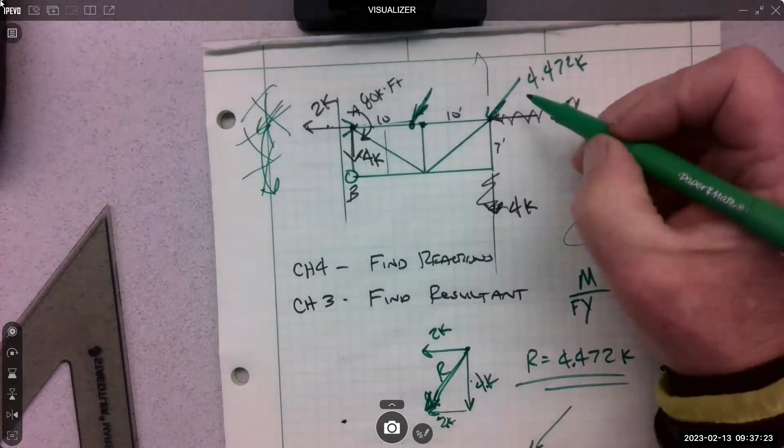And we would also want that angle theta. So when you have an angled force like this, that's all right here, correct? And so where I wanted, this would have been in the problem statement, I would have said, find the resultant at the top of the truss.

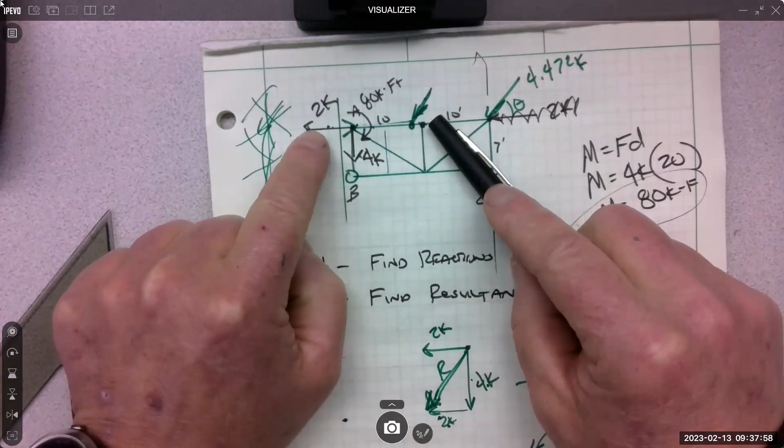So that means I want the resultant along this line. If the resultant is going to land along this line, the 2K does not contribute to the moment. So when you say the 80 kip feet, it's all made from the 4K, none from the 2K. When we did the 4K, we multiplied by this distance, and that's what created the moment. The 2K was here—it didn't make any moment.

So all of this moment is made by the 4K. That's why we divide by the 4K. And that brings us back to a nice, clean, horizontal distance because we used a vertical component.

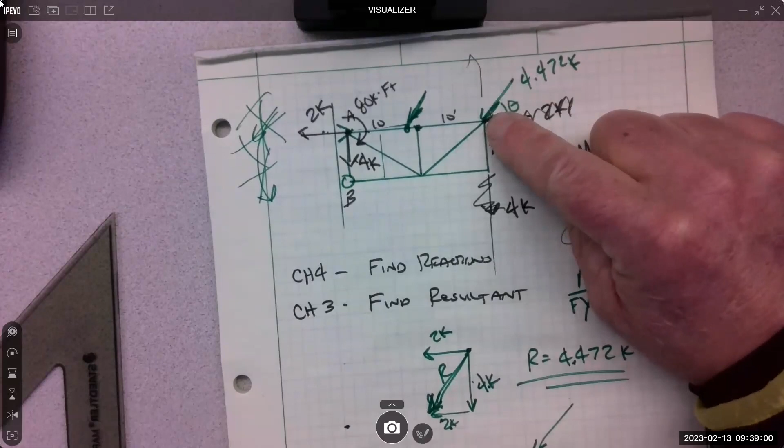Yeah. So anyone find it interesting? The resultant comes right back to this point. Anyone know kind of why, how that happens?

So remember the 4K was here and the 2K was here, correct? And I had you move everything here because I wanted you to go through that process, like, oh, I remember now how we moved stuff. That was good. But couldn't I have just moved the 4K up to here and had 2K and 4K at the same spot?

Yeah, way easier, because now when you find the resultant, it's right there, R, which is what you found anyway by moving it. You can move the forces anywhere and it will give you the correct answer when you move it back out. But there are easier and harder ways to do it.

This would have been much faster just to move the 4K up to here. No moment, because they both go through that spot, right? Pythagorean theorem out, the resultant, you got it, you're done. So you wouldn't have done any of that fancy stuff. But you also wouldn't have remembered the process.

That's going to take some reviewing. We haven't done that in a while. So the find the reaction thing, that's more current. Maybe practice this a little on simpler problems, remember what to do with distributions, and you're ready for chapter 4. Go back, look at this for chapter 3—that's going to be important. And then chapter 2 and 1.

And I'll give you one of these, and it should be just a bonus if you read the problem carefully, but I might give you something like this. And this is emphasizing chapter 2.

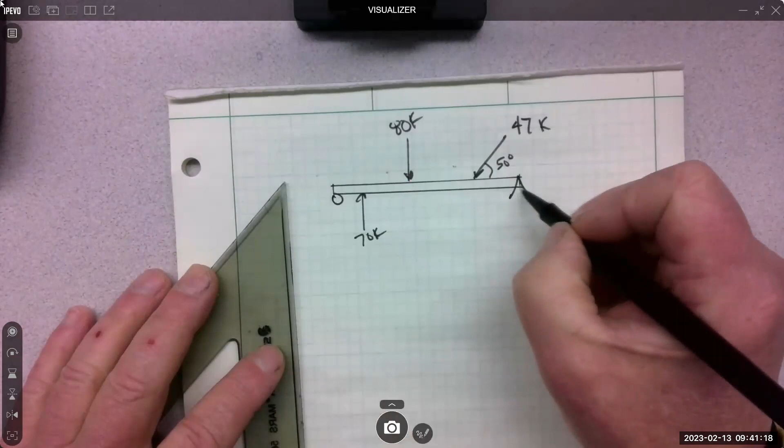Right about now, you should be going, what the heck? This looks hard, right? And then, I don't know, put a roller and a pin, give you a whole problem, right, and all the distances—2, 2, 1, 2.

But then the problem says, find the rectangular components of the 47 kip force. Okay, that's it, that's all you have to do. So what's that mean? Find the components of the 47 kip force—yeah, that's X and Y. That's this and this. Find this F Y. Find this F X. Done.

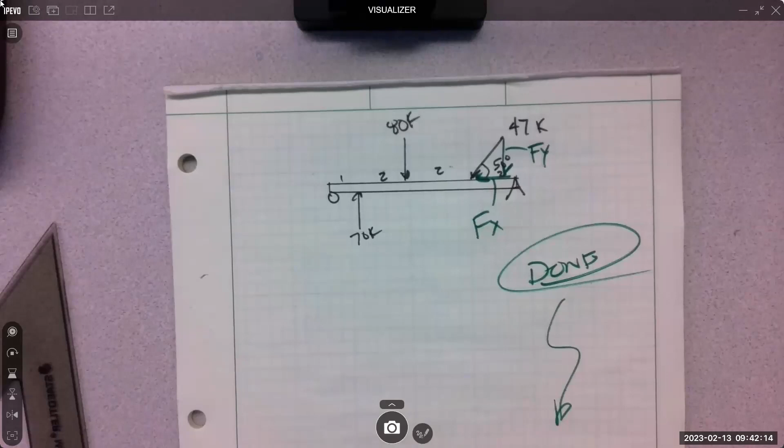Move on, next problem. That's a bone—I'm just throwing you a bone, like, do it. Swear every year a student will put in the reactions, solve the whole damn thing. Like, no, this is not what I asked. Just find the components of a force. That's chapter 2.

So read the problem really carefully and only do what you need to. And again, if you're unsure, ask. Somebody will always ask me, like, is this really all you want me to do? I'm like, yeah, just do what it asks. Just don't complicate things until you need to.

So spend a little time, open book, open notes, organize your thoughts. Like, hey, if it's a non-concurrent problem like this, what do I got to do? If it's a concurrent problem, what do I got to do?

Yeah, absolutely. Yep, I trust you guys. Questions? It's always a good time. Wednesday will be fun—it'll be boring for me.